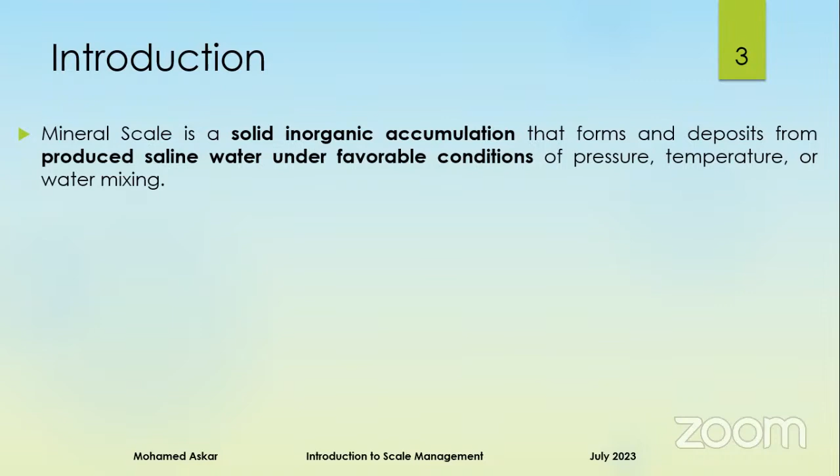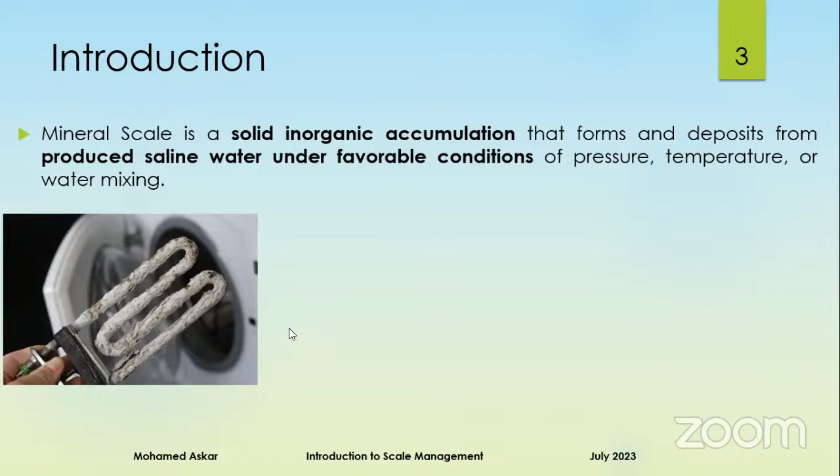Firstly, you should know that scale is a mineral deposit, which is not a hydrocarbon deposit. If you are facing asphaltene or paraffin, it's not a scale, it's a hydrocarbon deposit. Scale results from the minerals which are dissolved in the water. Everyone sees this photo in his house, like the water heater in his bathroom. If you take it out, you will have some scale deposition around the coil. It's calcium carbonate. And if you are using a kettle to make tea, you have some carbonate deposition due to the heating effect on the water.

For me, as a normal person, I usually use vinegar or citric acid like lemon juice to remove these scales. This is carbonate scales, calcium carbonate scales. We use acid fluids like lemon juice, vinegar, or baking soda. These fluids are acidic. You are now making an acid shock. This is actually the scale you are facing in your house.

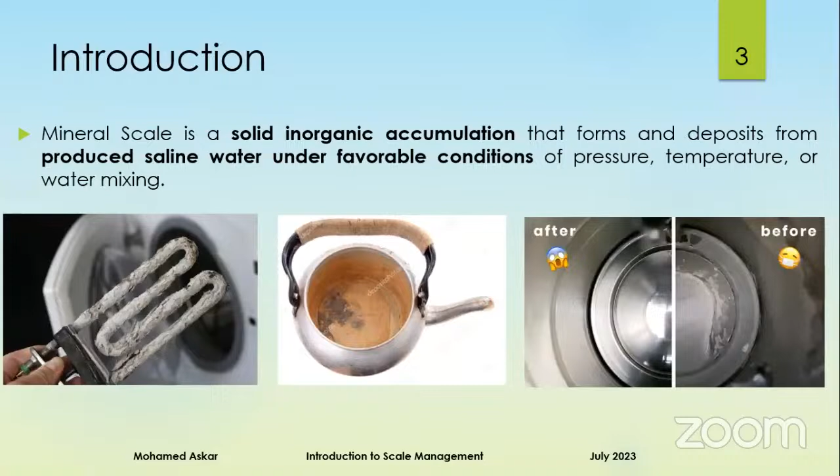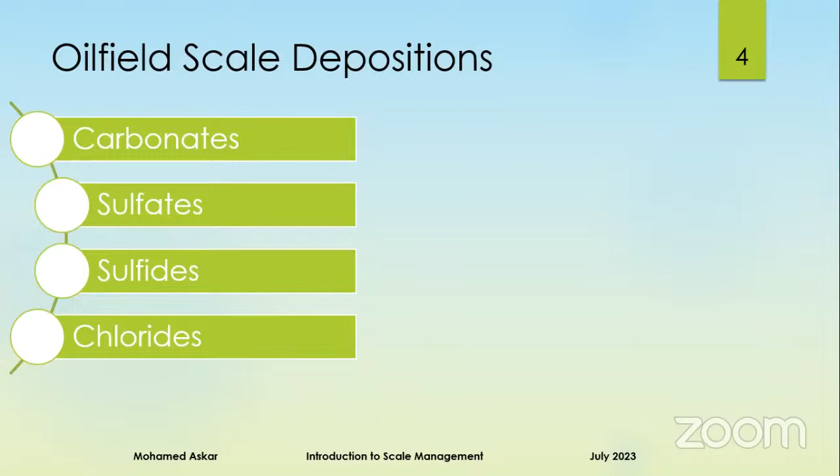But scales on the oil field are various types. We have carbonates like calcium carbonates, iron carbonates, and we have other scale types like sulfates: calcium sulfates, barium, strontium sulfates, and we have sulfides: zinc, lead sulfides. We'll go through the individual types of these scales after that. But I'm now transitioning you from the household scale to the industry scale. This is the industry scale.

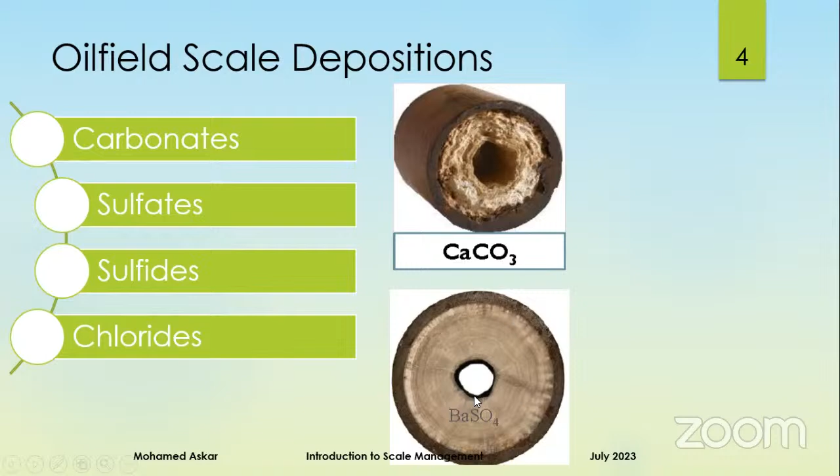You have some scales inside the tubing or inside the pipeline. It will not be a pure one, with barium sulfate or calcium carbonate. It will be a mixture. These are actual photos from the oil industry. Having this layer of scales, you are facing a big problem. You should use several chemicals. You should use an efficient system to prevent this scale from deposition. This is the actual photo in my company. It's a header joint, which has several types of scales, which hinders the whole entrance of the header and restricts the whole production in the field.

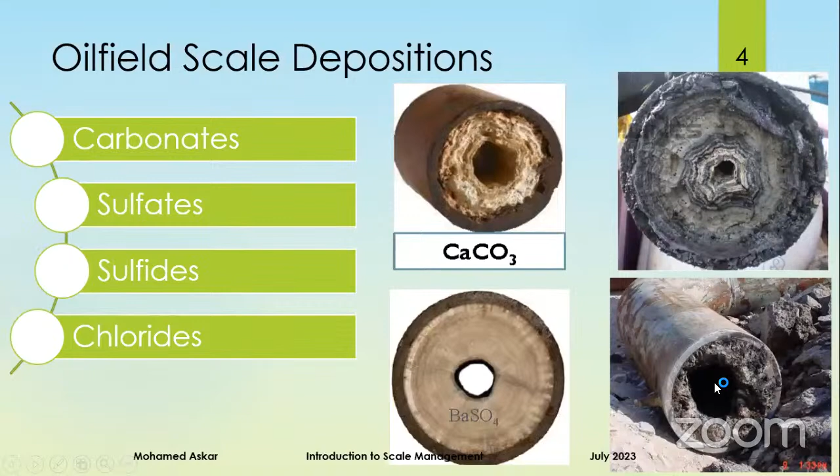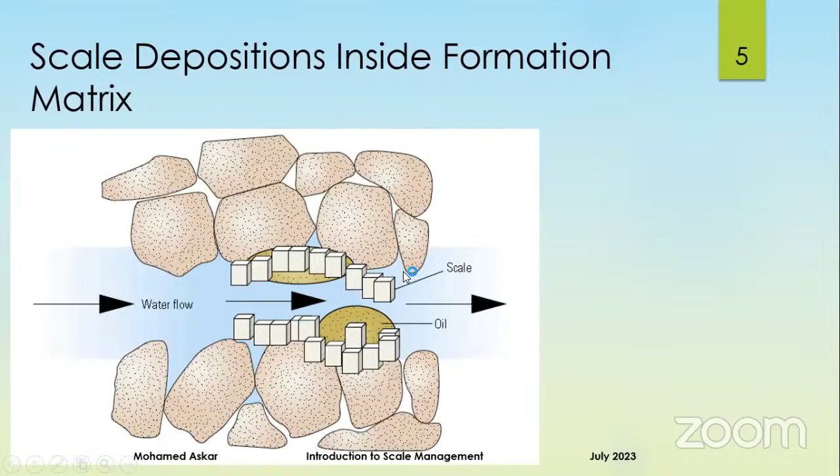Engineer Muhammad, I'm sorry, but the sound is not very clear. Can you hear me now? We can hear you, but with some noise. Okay, wait a minute. Is it good for now? If you have a problem, just inform me. If you can change the mic, it will be helpful. Okay. Assalamu alaikum. Yes, it's clear now. Thank you. Okay, let's continue. Do you have any questions in the chat box? Not yet. Okay.

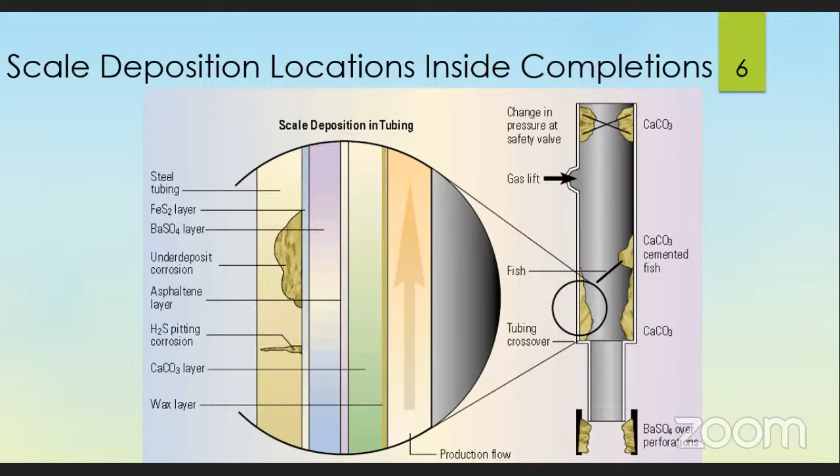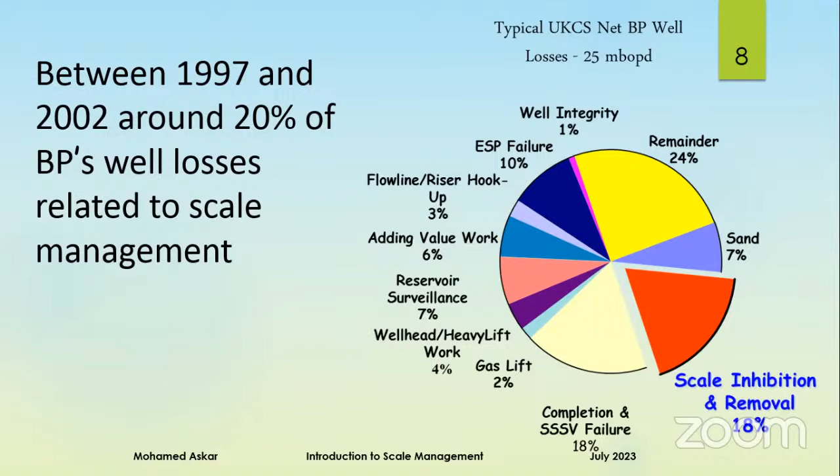Every operation, every chemical that will be introduced in your system will cost you dollars, millions of dollars, and will make you shut the well, shut the facility. So you are losing a lot of money, and you are paying a lot of money to fight scale deposition and prevent their accumulation inside your system.

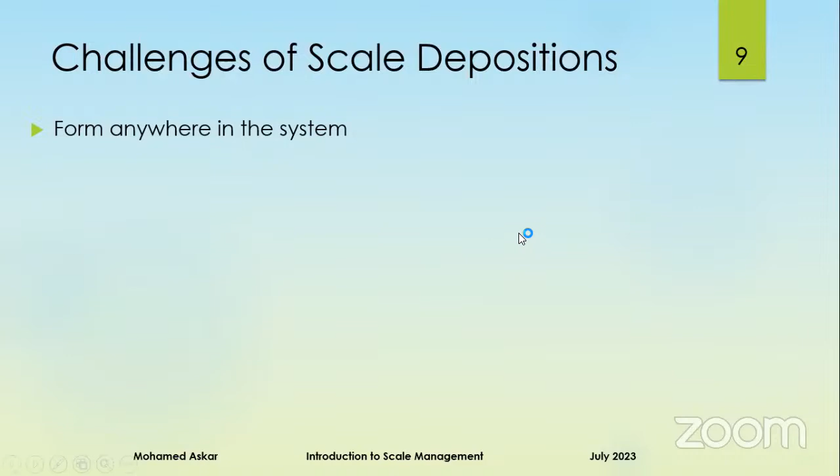So what is unique about scale? Scale can form everywhere in your system: downhole, topsides, inside pipelines, subsurface accessories, in your separator. This is a challenging aspect for you to fight. Some scales can deposit in a few hours. Some SPE papers report that some wells can cease to flow during the night. You have some halite scale, which is sodium chloride scale. It can form very quickly, during a few hours, to block your well and make the well cease to flow. So you should be proactive and prevent the scale from deposition, not to lose your asset.

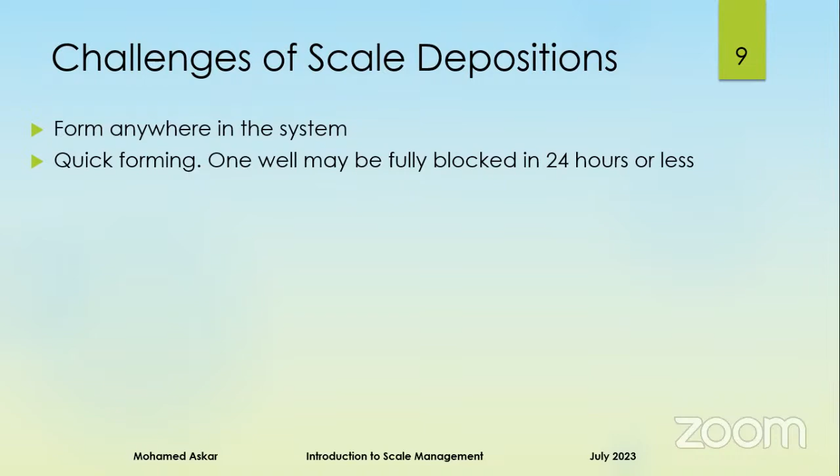Some scales have low solubility against acids or chemical treatments, like sulfate scales, barium and strontium sulfates. They are very hard and they can't be cleaned even by coiled tubing. Coiled tubing operations for cleaning or milling sulfate scales can be a challenging and difficult job for the intervention team to remove these scales.

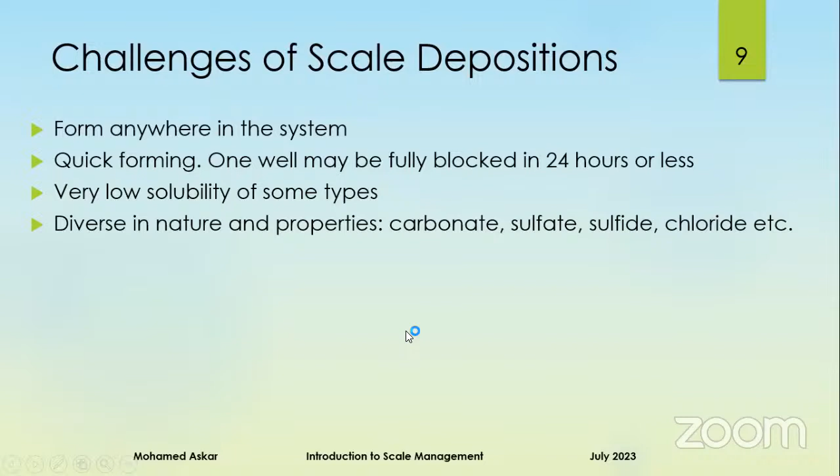You can face several types of scales, as we saw in the picture of the actual scales. It will be a mixture of various types of scales. You should make an optimum chemical solution to dissolve carbonates and dissolve the sulfates, sulfides and chlorides. You will have a mixture. This mixture is very challenging and very special for you. You should formulate a special treatment and plan ahead a good job for mechanical cleaning and removal of these scales.

If you have any scales in the system, you will restrict the flow capacity of your pipeline or tubing. So you will face some deferment in production and injection rates in your company. If scales are depositing in an accessory like the subsurface safety valve, it will make this valve leak or get stuck open, and it will make the well a high-risk well.

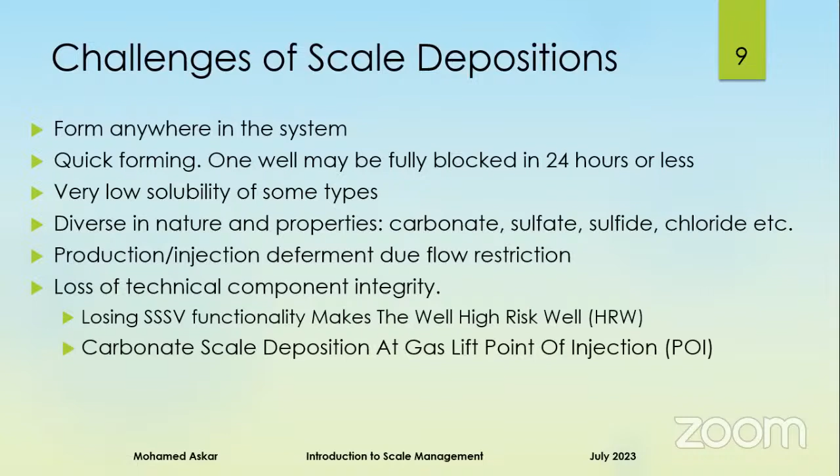As we said, gas injection through the point of injection through gas valves will make some stripping effect and some cooling effect for the production stream, and we will have some depositions around the operating valve. These depositions may block the operating valve and decrease the efficiency of the lifting capacity of your gas lift system.

As we said, if you have more restrictions inside the tubing, you will lose the accessibility of the well intervention capabilities inside the well to make some perforations or PLT jobs. You will have a limitation to increase the well production, and you will lose the well at the end. If you are letting these scales build more and more and block your well, you are facing several problems for this well. Some scales will have some corrosion under them, which will affect the integrity of the tubing or pipeline.

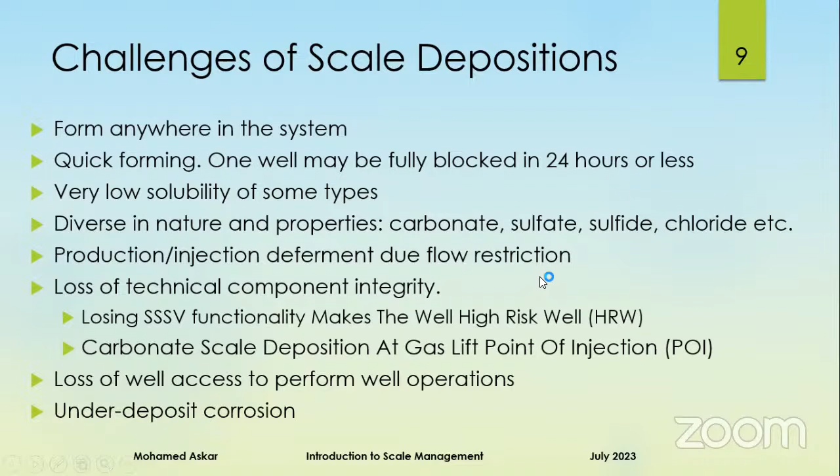So as a petroleum engineer, my objective in the company, in our team, is just to maintain the well reliability and maintain steady production rate of the system or increase it. If I have some damage, I can dissolve the scale to increase the capacity of the system. It will be good. Scale inhibition is far better than scale dissolving. If I have the capability to prevent or inhibit scale deposition, it is preferred to scale dissolving.

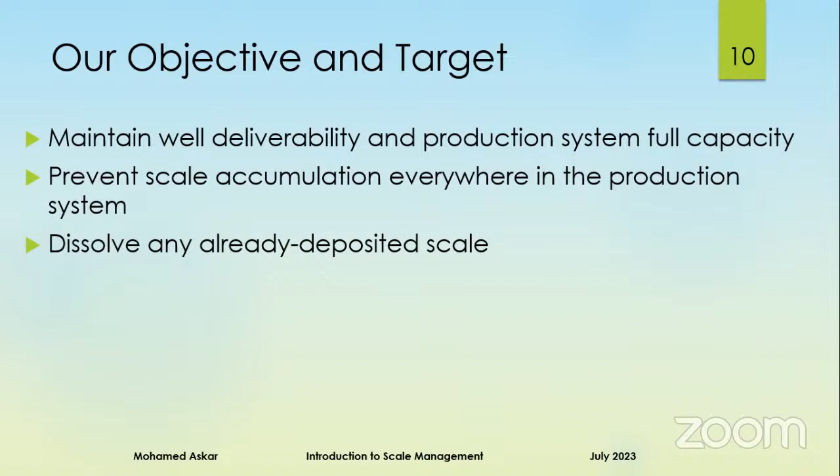If you have some scales which are faced during the intervention jobs like slickline gauging or tubing operation, you should plan a chemical or jetting operation to remove these already deposited scales and restore a clean and good completion. If you are using scale inhibition jobs, you should optimize the chemical consumption. You should introduce new technologies to prevent scale. Every operation now in the industry costs a lot of money. You should make the system very efficient, very effective, with low cost.

For acid jobs, which are the common jobs to clean and remove scales, we should optimize the formulation, the recipe of these jobs, to prevent the side effects; some iron sequestering agents are used especially for redeposition of iron compounds after a spent acid job.

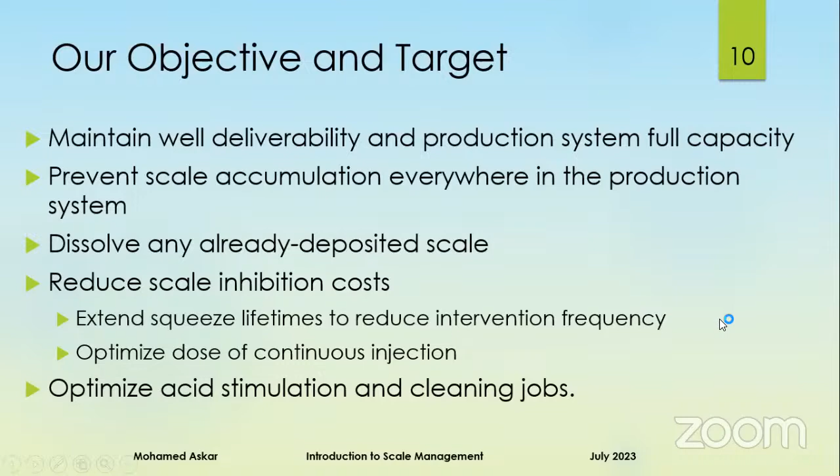To define the most common scales in the oil industry, we will start with the water soluble scale, which is sodium chloride, which is the salt. Sodium chloride, NaCl, the mineral structure is called halite, and it can be cleaned by fresh water. For acid soluble, we are talking about carbonates. The first one is calcium carbonate, which is the most common and famous one in the oil industry and in water industries and in household applications.

This scale mineral has several mineral structures according to the packing of the mineral form of the crystals during the deposition. You will face some different forms, but all of them can be dissolved by HCl or organic acids, HF and other acid types. Iron carbonate, which is called siderite, can be dissolved by HCl and THPS. This is a biocide chemical.

Iron oxide is normally faced in injector wells, not producer wells. In injector wells, you are pumping some seawater injection, which has some traces of dissolved oxygen. This oxygen can react with the metallic iron and form some iron oxide minerals. These minerals can be dissolved by acids or chelating agents.

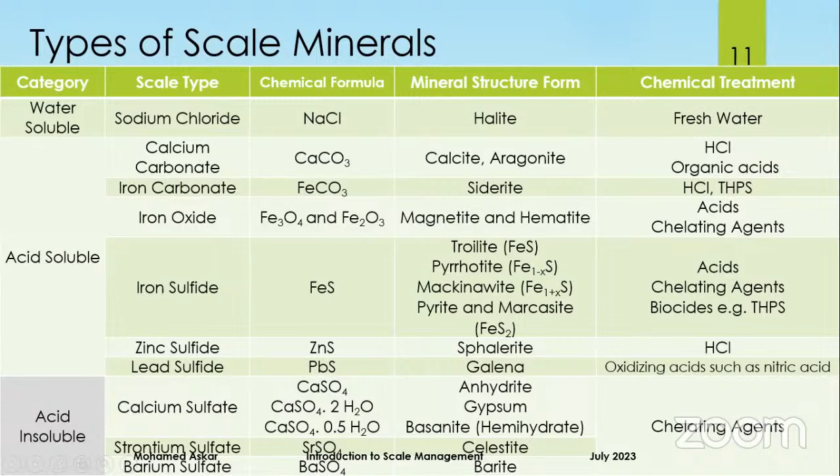So what are the factors for the scales to form? If I have two incompatible waters, which will react with each other, and a high permeability streak, which will accelerate water flow. If this is a producer well and I'm injecting water in an injector well, the water will get some speed in this high permeability streak and will get produced inside the producer well.

The reaction between the injection water, which is seawater rich in sulfate ions, and the formation water, the dark blue one, which is rich in barium, strontium, and calcium cations. You will mix two incompatible waters with anions and cations in each one. The reaction of these waters will deposit some sulfate scales, especially barium, which is the hardest one to deal with, at the bottom of the well.

If you have some radium in the formation water, which is radioactive, it will be the first one to deposit, even before barium sulfate. You will face these sulfate scales at the bottom of the well, and after a short distance from the perforation, like in the bottom part of the completion.

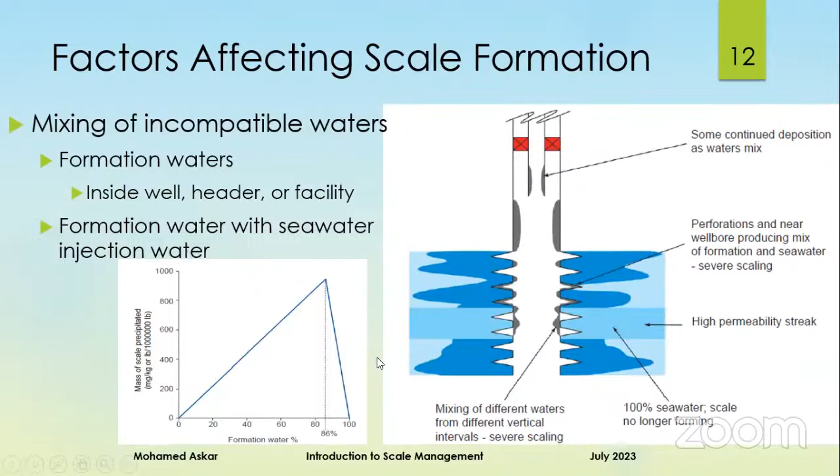Pressure changes. If you are reducing the pressure of the stream, the dissolved gases will come out of solution, especially CO2 and H2S. And these gases are acidic. If you remove them from the solution, the pH of the solution will get higher and the solubility of the scales will get lower.

This is an actual case from my memory. We are facing some depositions at these depths from 5,000 to 6,000 feet. I am using a gauge cutter of a certain type. I just go down, I have some obstruction at these depths, doing some jarring down to clean the obstruction and detect the profile at this depth. But this depth is dominant for me. I am facing this obstruction every time, for several years during the production life of this well.

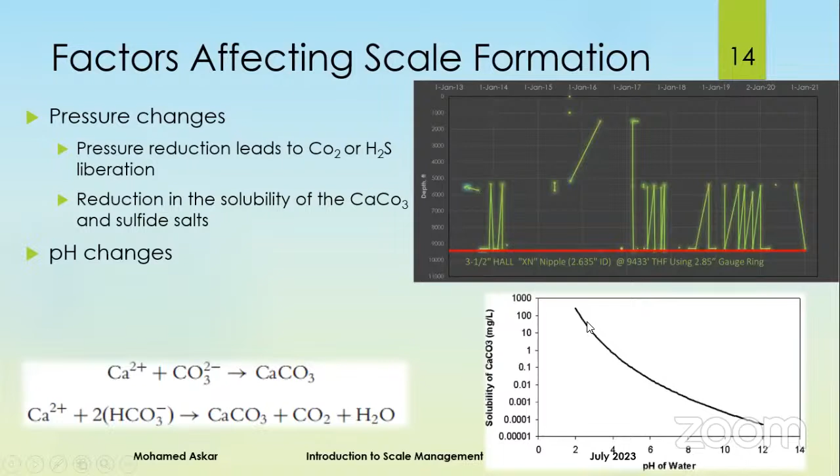pH changes. If you have some increase in the pH, the solubility of the scales will get lower. Some chemicals like H2S scavengers are triazine based. If you are injecting H2S scavenger in your system, you will increase the pH of the produced water, decrease the solubility of your scales, and face some scale deposition at the point of chemical injection.

Reaction kinetics and fluid dynamics. Most of us care about pressure, temperature, ionic strength, dissolved ions, pH, but current developments and software are dealing with these two factors. If you have some calcium and some carbonate reacting with each other to form calcium carbonate scale, they will not react instantaneously and form scale at the same interaction depth.

They will take some time according to the fluid rate, the temperature, the roughness of the surface of the tubing, according to everything in your system. We should evaluate the system as a system, not ion against ion. You should evaluate everything in your system, the dissolved gases, the pH of the fluid. So they are now making simulations of scale deposition to simulate the actual downhole conditions.

So we are moving to this point. I have some ions dissolved in the water. These ions will be paired with each other. Cation against anion will form a microcrystal. This microcrystal will get larger in size, having some more deposition or more precipitation to make the crystal larger in size and larger in weight. This microcrystal will be a macro one.

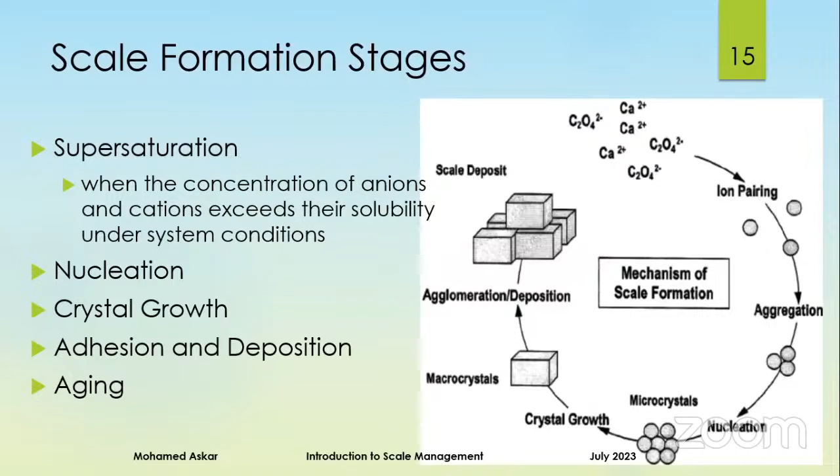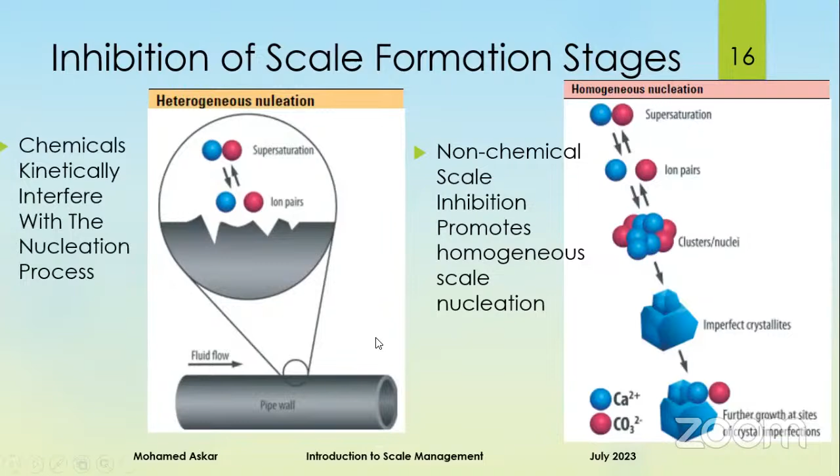We'll explain scale inhibition in a different part after some while, but now as we are talking about the formation stages of scale from ions to crystals, if I'm using a chemical scale inhibitor, this chemical scale inhibitor will interfere in the process and make some delay in the scale formation. It will interact and retard the crystal growth. It will prevent microcrystals from interacting with each other.

But for the new trend in the industry, for non-chemical scale inhibition, we are introducing energy. Introducing energy to the ions to promote and accelerate scale deposition in the solution. My problem is scale deposited inside my tubing and inside my pipeline, on the rough surface of the tubing.

But if I give some energy to the scale ions to make them be like a microcrystal floating inside the bulk solution, you should produce this microcrystal from the bottom of the well to the surface, to your facility, to your process at the end of the line, without making scale depositions. You are now promoting and accelerating homogeneous scale deposition, not heterogeneous.

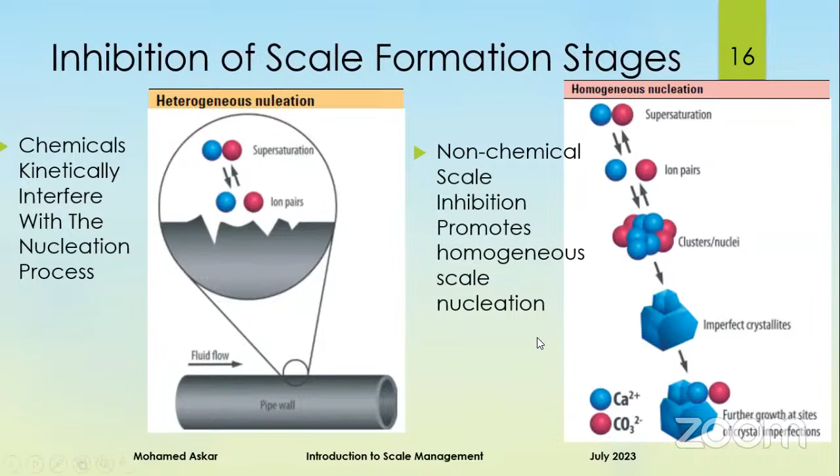I am afraid that we can face heterogeneous scale nucleation and scale deposition at the walls of our tubings, but if I introduce energy of different types to the system, it will promote homogeneous scale nucleation in the bulk of the solution, and you will produce scale like fine microcrystals, which will not harm your system or restrict your flow capacity inside tubing or pipeline.

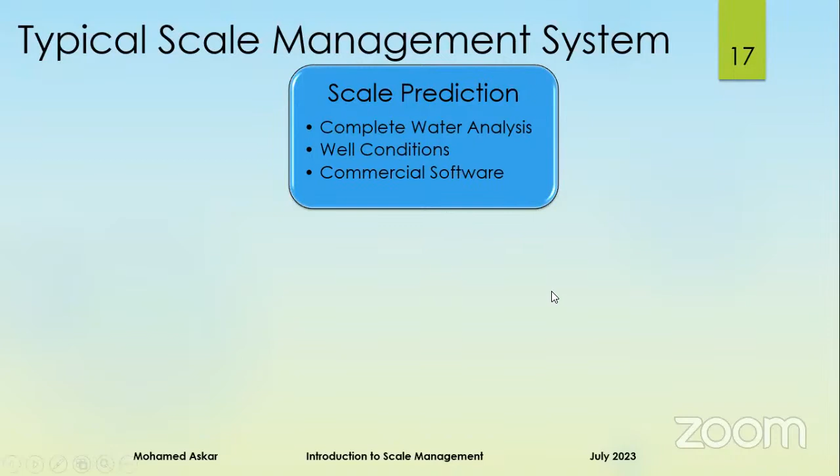For scale management, firstly, if I have a new well, without drilling, without producing the water, I don't know the composition of the water, or the scale problems that I will face inside my completion, inside my pipelines. So I will use a complete water analysis from this well or an offset well, simulating the well conditions in software to predict what scale type and what scale amount will deposit in my system, to be proactive and make some scale prevention for it.

If I have some producing wells, I can detect the actual scales inside the completion by slickline gauge cutters. If I have some pipeline, I can pig the pipeline and collect the deposited scale amount at the end of the line. You can put some scale coupons with holes in them, collect the scale coupon and analyze the deposited scale to evaluate how many holes are plugged and the severity of scale deposition in your system.

Scale sample analysis: if you collect a physical scale sample from your system, downhole or surface, you should analyze the scale sample. By a third party or your chemical lab in your company, you will define the ions of the scale. You will define which type of scale you are getting in the system, like carbonate scale. You can dissolve it by acid.

If you are facing some sulfate scales, you will plan a chelating agent job. If you are facing sulfide scales, you can use some biocides. If you are facing a mixture of sulfide scales, you will plan a mechanical cleaning job. You should know the type of scale to prevent it, to inhibit it, and to make some remedial work to remove the already deposited scale in your system.

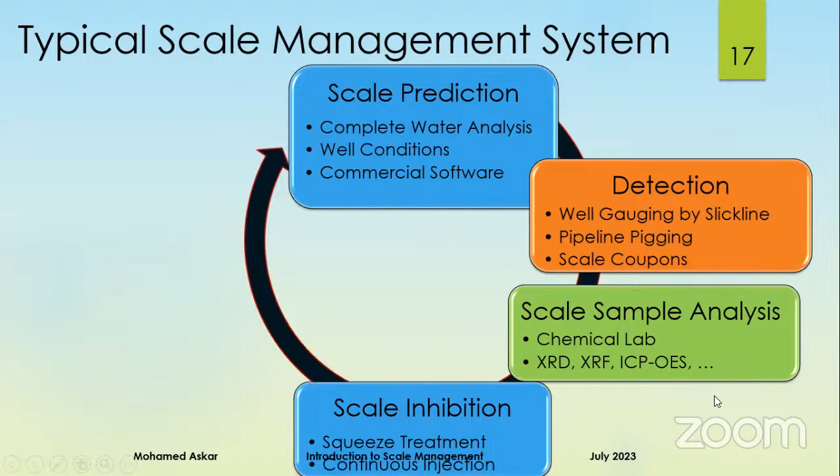For scale inhibition, you can make some scale squeeze or some continuous injection of a scale inhibitor just to prevent the scale deposition. For monitoring, after scale inhibition practice like scale squeeze, you should monitor the well and track its performance: whether it needs a resqueeze again, or whether it needs a change of the chemical inhibitor.

If you are making good progress in preventing scale, or you are just exacerbating the problem, you should change your mind to use a new chemical or a new technology. You should evaluate the system continuously to make this cycle more efficient. This is the well assessment job.

If you can't collect an actual scale sample downhole, you should monitor your well performance for a decline in the production rate of the well without any operational problem. This may be due to scale deposition inside your system.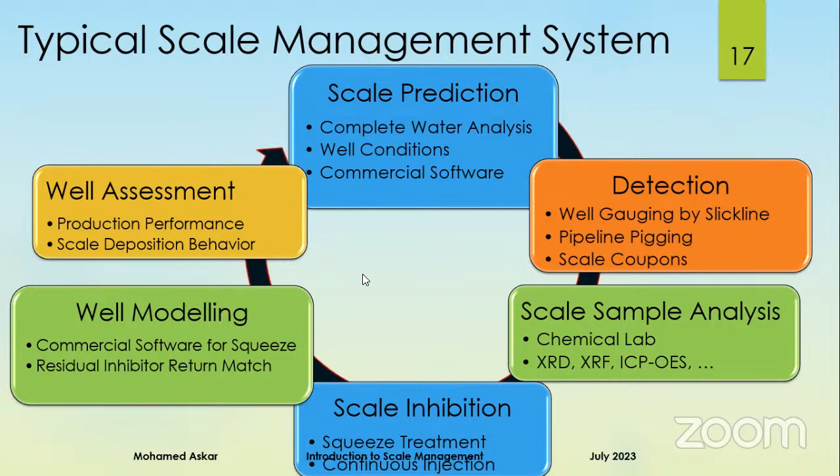Prevention of scale deposition. I can make some operational recommended practices just to prevent scale deposition, like choosing the water sources. For sulfate scales, if you are pumping seawater as injection water to support the reservoir pressure, you are introducing sulfate ions into your system. These ions will interact with barium, strontium, and calcium ions and will deposit sulfate scales. So you shouldn't mix incompatible waters in your system.

And if you have some restrictions in the tubing, you should avoid them. These restrictions will introduce pressure disturbance in the system and will promote more scale deposition. For injection water, you should remove any acid gases dissolved in it, like CO2 or H2S, and you should remove any bacteria in the injection water.

This bacteria, especially sulfate reducing bacteria, will react with the system and take the sulfate ions and some hydrocarbon compounds at the bottom of the well inside the formation and produce H2S. This H2S will react with zinc, lead, and iron cations to deposit sulfide scales.

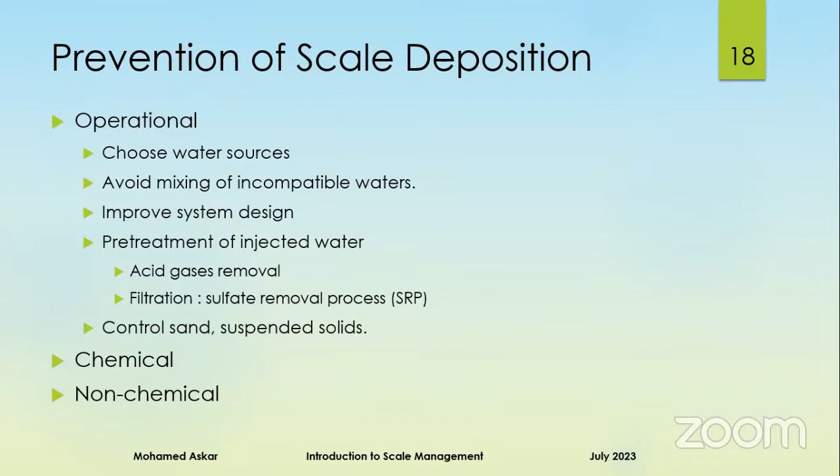For chemical prevention, we will talk about the chemical scale inhibitors that are used in the industry, and the new trend, which is non-chemical or physical scale inhibition. We'll talk about some technologies presented in SPE papers or some technologies from some companies.

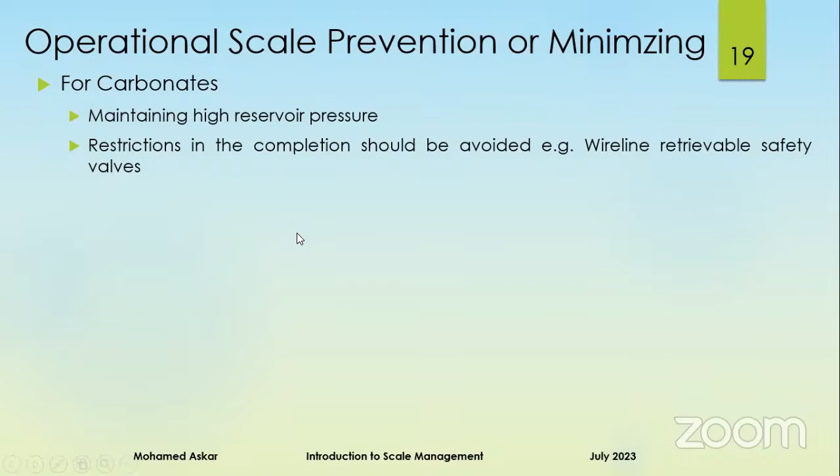For carbonate scales, you can prevent them by maintaining high reservoir pressure. Depletion of the reservoir will make a secondary gas cap above the oil. This gas cap will take the acid gases like CO2 and H2S out of solution, as we illustrated earlier, and it will promote more scale deposition. And also restrictions should be avoided in the completion.

For sulfate scales, the main action is to remove the sulfate ions from the seawater injection. You can use some aquifer water to support your water injection. If you are planning to pump seawater into the formation to support the reservoir pressure, you can pump some aquifer water, which is compatible with the formation water, before seawater injection. This methodology is presented in an SPE paper, which was applied in Aramco in

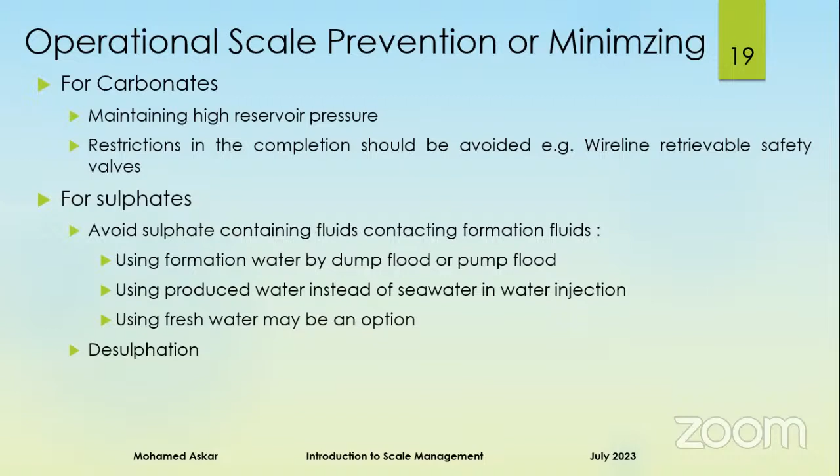Engineer Muhammad, actually, we lost the sound. Okay, sorry. I think the instructor will rejoin now. Okay, so we apologize to all the participants. I think Engineer Muhammad has an issue with his internet connection.